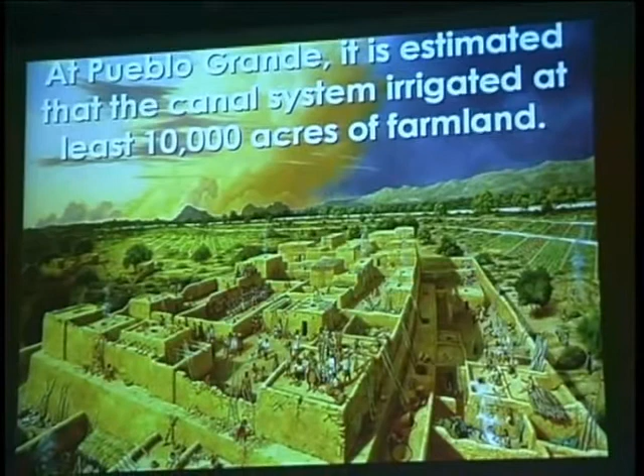One of the early ruins in the Salt River Valley, which Phoenix is in, is called Pueblo Grande. At this site, you can go—there's a museum there, and the old platform mound is still there. This is what they imagined it looked like, but they estimate that at this particular settlement they irrigated at least 10,000 acres of farmland.

The Salt River flows, or used to flow, right through the Salt River Valley, and they had miles and miles of these canals that they dug by hand with stones—I'm not sure exactly what implements—but these are all the prehistoric canal alignments through the Salt River Valley. This is Tempe, where ASU is, and this is where downtown Phoenix is, just to give you bearings.

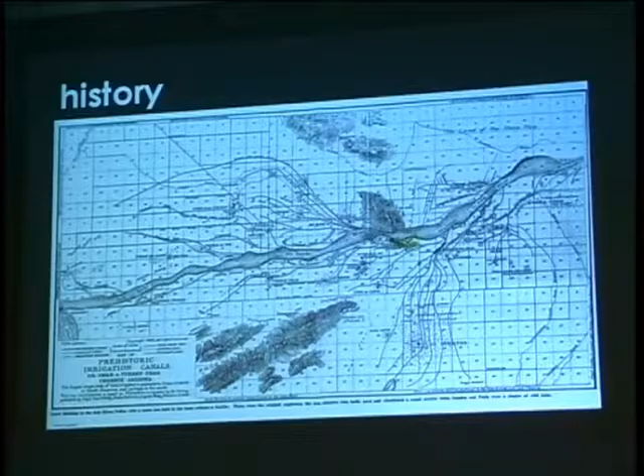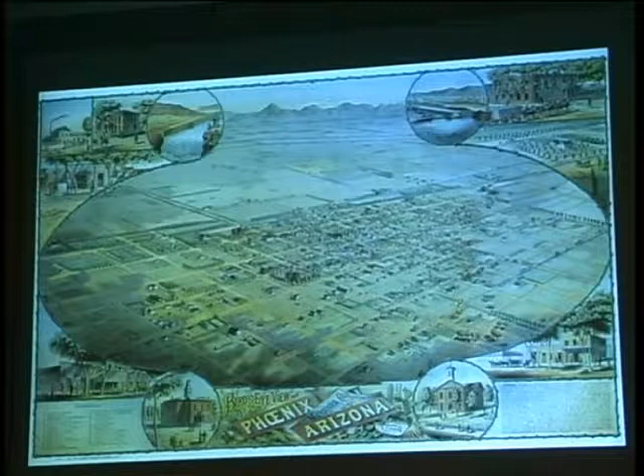So this place has always been about people's ability to move water, getting the water in so that they can survive. This is a map of Phoenix in the late 1800s, and the city fathers were touting Phoenix as a city of gardens.

By the first few decades of this century, many valley waterways and irrigated fields were so lush that visitors and civic boosters alike were calling Phoenix a city of gardens and trees. Everywhere there is shade, and plenty of it, observed a visitor in 1905. The entire valley, from Mesa into Phoenix, is one solid mass of green, and every road is a perfect avenue. Chinaberry trees, palm, and cottonwoods line the driveway, or lanes as they call them, and the entire distance from Mesa to Phoenix can be driven under an almost unbroken arch of shade.

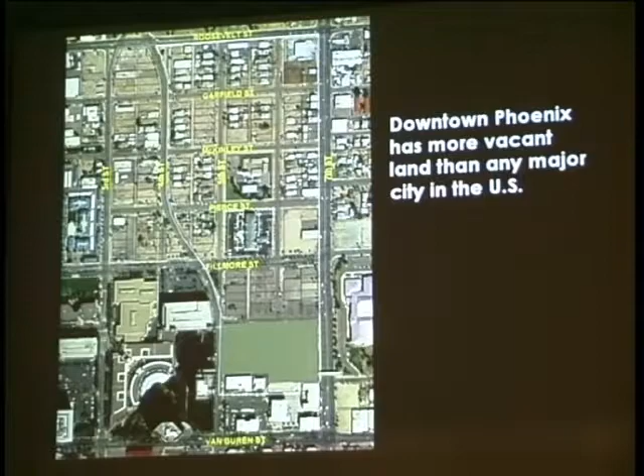So downtown Phoenix, this is an aerial view of a portion of downtown Phoenix, but it has more vacant land than any major city in the US. It's now the 5th largest city, and it's kind of like a donut. There's lots and lots of vacant land all throughout downtown. This is just right in downtown.

Our firm is really trying to figure out ways to connect the urban dweller with nature, because when you're in the city, you really lose the sense that you're in the desert. There are so many overly paved areas, places where nature isn't really even allowed in. And if it is allowed in, a lot of times it's a plant that might grow back east or in California. So we're kind of into really connecting people with the place of Arizona in the city.

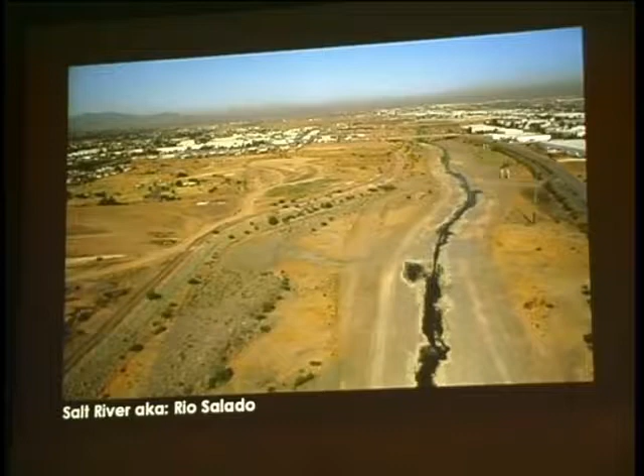I wanted to show you this, even though it's not a very good slide, but the Salt River actually flows right where this pointer is going. The Salt River used to have a floodplain miles wide, but now with the city encroaching, it's become this constricted riverway. Industry is also formed right on the edges.

For about 100 years, people have thrown their trash all along the banks of the river. There are landfills, gravel mining pits, I mean, it's just been abused. And then, further upstream, the Roosevelt Dam was built, so there's no water in the river unless there's a big rainy season and they let some of that water out. So it's really been this scar that has divided what you saw of downtown Phoenix with South Phoenix.

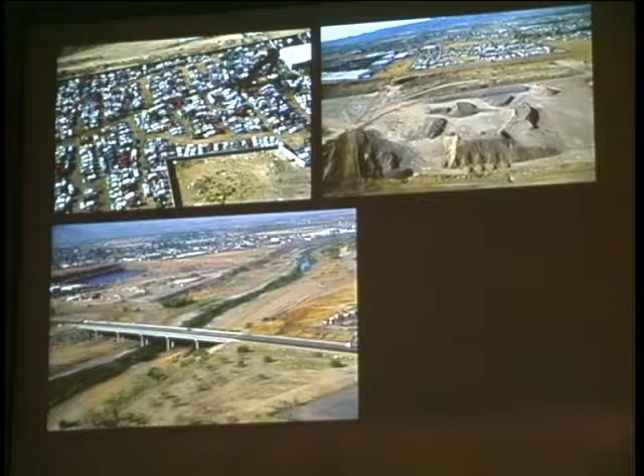So I'm telling you about this project with the Corps of Engineers in the city of Phoenix to try to restore the native habitat that used to grow along the river.

Our first project was on Central Avenue, and the city wanted to somehow mark going over the river, because you hardly noticed it, the land just sort of barely fell away from the road. It was always kind of bare, and you just didn't pay much attention to it.

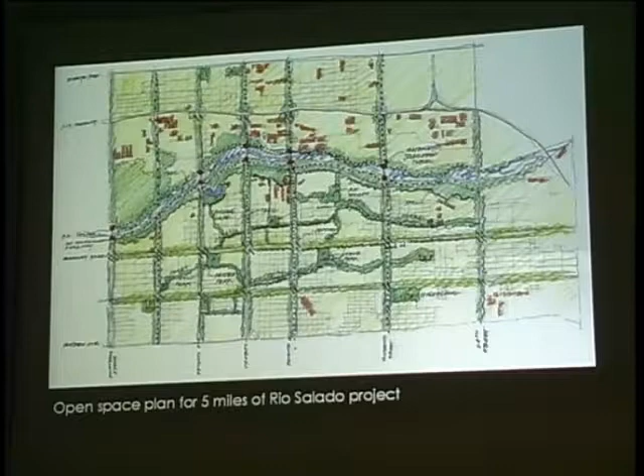We worked on this with a team, an architect and engineer, but we were really inspired by the Hohokam platform mounds, like that first one I showed you, and how they built places to view the river. We knew this was going to be essentially a trailhead for future trails the Corps of Engineers was going to do on the river.

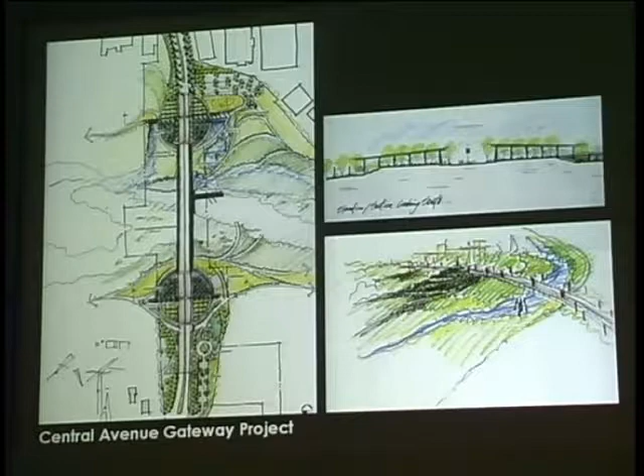So we proposed these plaza-like nodes on either side of the river with a shade structure, planted with a bosque of trees, that celebrate that passage over the water and create a meeting place before you go down to the trails below into the Salt River bed.

This is like a perspective sketch. This is very typical of what our concept sketches look like in the beginning, when we're trying to express an idea.

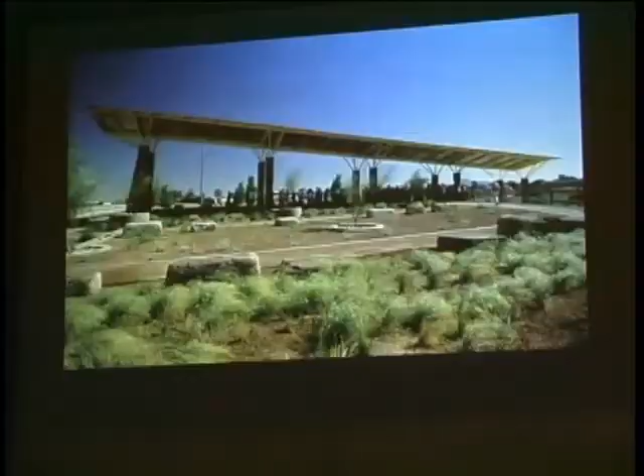So this is the first phase, and the City of Phoenix has actually built this with their own forces. They've been very short of money and just haven't had a whole bunch to put into it, but you can see as it's growing, the trees are becoming more prominent.

We wanted to convey the whole idea of irrigation and canals. On a civic project like this, typically there's no money for fountains or anything like that, so this was probably one of the first projects where we tried to use irrigation as a fountain. We created these irrigation canal runnels from tree to tree that you see when the water happens to be flowing.

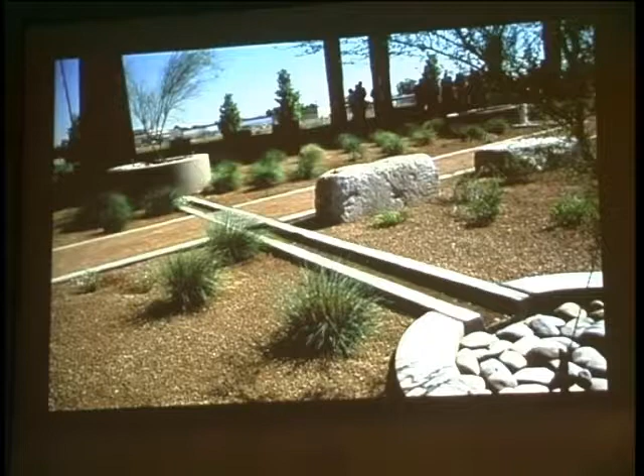You guys may be saying, geez, that's no fountain. But for us in Phoenix, it's a cool thing to even at some odd moment actually see water running through something. So the other thing we felt we had to do was reuse the trash that people had thrown on the river.

These huge monoliths of concrete footings had tumbled down the river and been worn like that. We got to go pick all these found objects and put them in the plaza as little sculptural seating areas or places to pause, that show the power of water and hopefully teach kids that you don't throw away trash, you reuse it.

This is the other side of the river, the northeast quadrant. The whole theory of this habitat restoration is that first we're using a combination of wastewater from this big stormwater drain. There are several of them that feed out into the river, and that's one source.

The other source is groundwater, the first layer of polluted groundwater. There are all these landfills around, and that first layer of groundwater isn't so good. So this is the reservoir we created. The water gets pumped in here, and then we run it into smaller canals all through the site. This is a canal coming from one of the big stormwater drains.

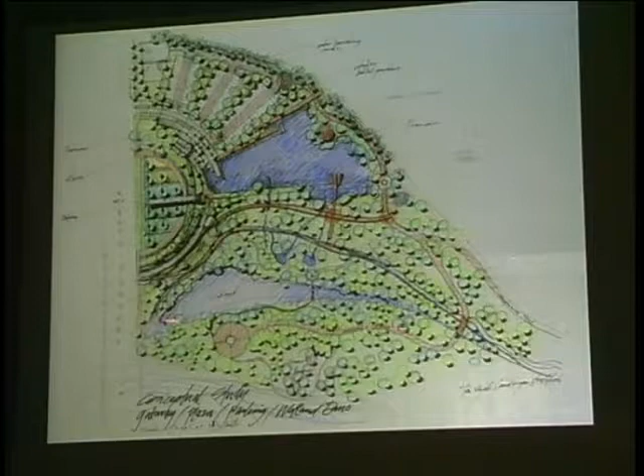Then we have trails all down on these banks. This is one of the little canals that feeds the habitat, looking back up at the gateway. Here you can see an old curb that we used as a seating element all throughout.

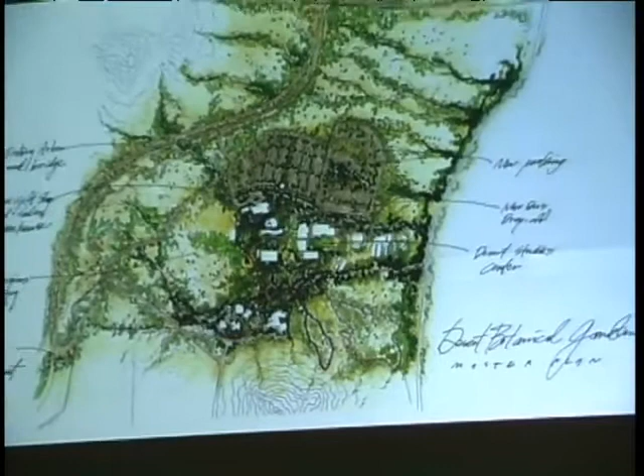John Douglas was the architect. This set of buildings and this set of buildings were built in this phase, and we were responsible for all the hardscape and exterior spaces.

This is the entry monument. There had been no monumentation at all when you came to the garden, just one of those standard little city-issued signs saying Desert Botanical Garden. We built this out of gabions and filled it with native stone, a simple entry monument marker.

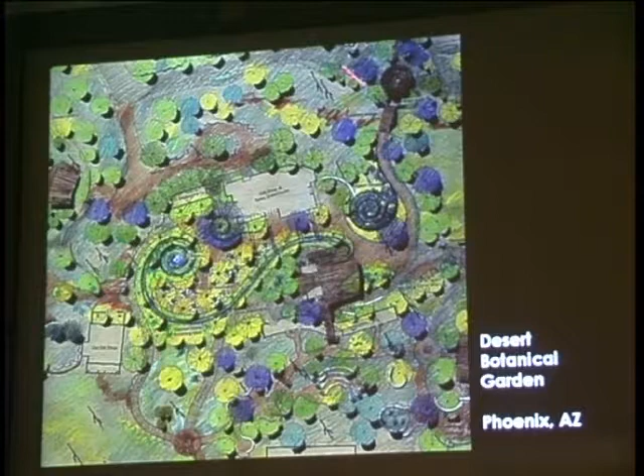That big parking lot I was telling you about is up here, so we intercepted the lane in the parking lot and put an entry pavilion here that helped to slow the traffic down so people couldn't whiz back and forth, and created a marker in the parking lot to draw people in.

The symbol of the garden is the agave, which you may have heard of as the century plant.

We wanted to showcase the ethnobotanical studies and research that the garden had done on the agave at the entry, and to kind of lead people in and create a focal point and also a baffle for the gift shop, we wanted to get people right in here. This is the new admissions area.

We created a landform here that's sort of in celebration of the agave. Then we needed outdoor space at the new gift shop. This is the exit, and so we carved a space where this old parking lot used to be, all through here, and made this rainwater harvesting garden and plaza area.

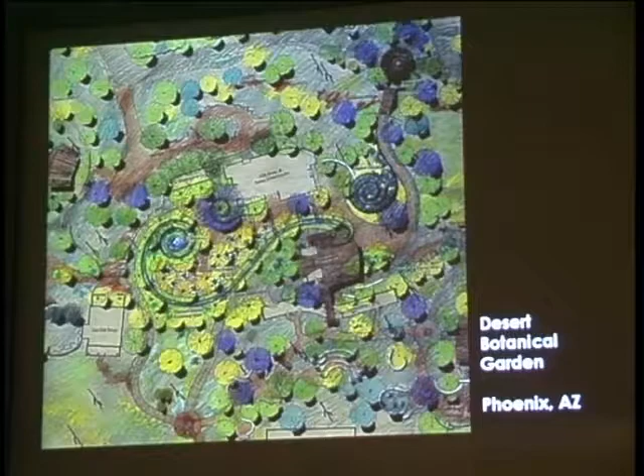This is a shot looking down at the entry arbor. Again, this road used to go all the way through, so we broke out a little island there and did this entry arbor and bridge.

There was a wash here, and you never used to even know it. Do y'all know what a wash is? Or an arroyo? It's where water runs, sometimes very rarely, but it's a dip in the grade where lusher trees and things grow. Those are some of the most precious parts of the desert, where the water flows.

So we created a bridge there. Before, they just had a little walkway and a little pipe about that big—you'd hardly even know that you were going over an arroyo. So we wanted to celebrate that crossing.

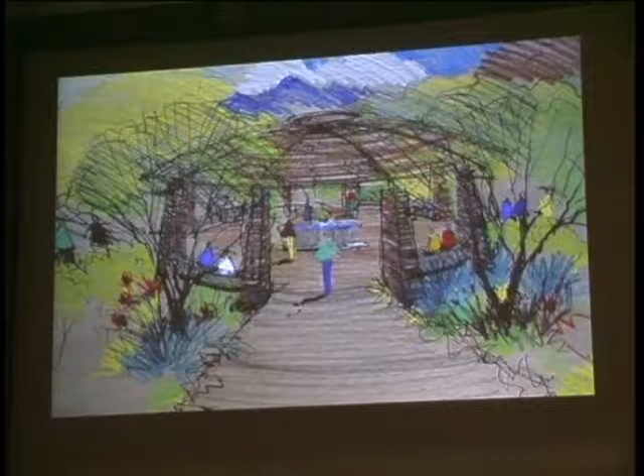These are entry sketches of the entry arbor. We went through some budget cuts and everything, but these helped to raise money—they used our sketches to raise the $15 million they needed for the entire project.

This is how it turned out—we lost our stone for budget reasons, and in Phoenix we're always trying to come up with ways to use just regular materials in interesting ways. This is made out of basically just weathered steel pipe and rebar, and we wove the rebar in and out of the joists. Eventually, the plan is for the desert vine, Mascagnia macroptera, to grow up that.

We also used a tractor disc for this little fountain. We don't have the big budgets—I know 15 million sounds like a lot, but a lot of that went to the architecture, and we had about 6 to 6.5 million for all the things like the entry arbor, the walkways, changing the parking lots, the bridge, etc. So that's just looking back.

Just some detail shots of the rebar climbing up and the vine climbing up the entry arbor. And our bridges, we used a C channel for the top and inlaid it with stones. In every project, we're always looking for ways to appeal to all the senses, including touch, and it's become kind of a trademark detail of the Desert Botanical Garden.

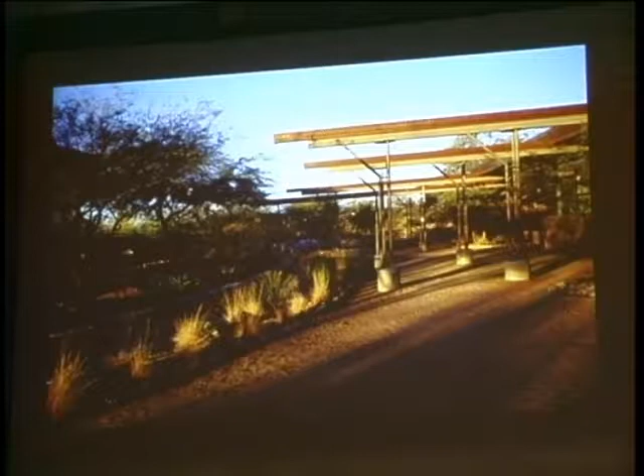Looking back out, you can see this is where our water harvesting runnel starts. We worked with John Douglas to get the water from the roof of the gift shop. It's not that big of a roof, so we're not going to get tons of water, but it was really about expressing how sacred water is to us and making the path of water a special place in the garden.

This is looking back where it goes deeper and deeper into the existing grade. The parking lot was basically up at that higher grade, and we just cut and carved in, sculpted this little plaza. There's lots of kids in urban Phoenix that never get out hiking in the arroyos or the washes. This is just one near Piestewa Peak, but they're just special places where you're sheltered and cooler, and that was really the sense.

This was the parking lot that was there before, and this is after, in about the same spot. Hopefully people, even though they may not get to the desert, would get the feeling of what it feels like to be next to an arroyo.

This is a sketch that we did in the beginning to show the concept, and then this is it from last year after it's grown. The final place where the water goes is right back in here. It's kind of hard to see in this.

This is a wildflower pavilion that we designed with very natural materials, just nestled into the desert, where they hold weddings and special dinners and things.

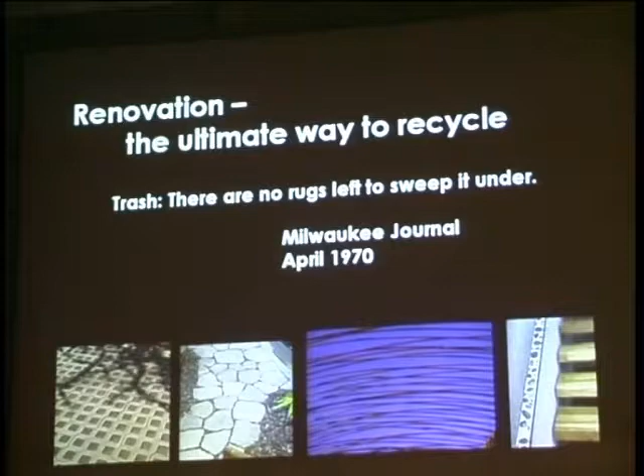We've done a lot of renovation projects, and I love working on renovation projects. This is my building, my office building, that I convinced a bank to let us borrow the money to buy—so that's a before picture. It looked like a little dentist's office kind of thing, and that's it now. We sandblasted it all, changed that front soffit, and totally redid the landscape and hardscape.

We used gabions for the retaining wall out front. I love the thought of using these because the block and the concrete that the building itself is made of is what this rock is that came down the Salt River—they grind it up and make the concrete. So it was just kind of like the rock in all its forms.

This is our parking lot. We used a permeable paver and then stabilized granite entryway. I planted this—it used to be asphalt all the way to the west side of the building, and then there was that little piece of turf out front. But this is right in central Phoenix where it happens to be very lush and green, so I used all desert riparian grasses and the native mesquite. It blends in, but it also stands out. That's the entry up to the front.

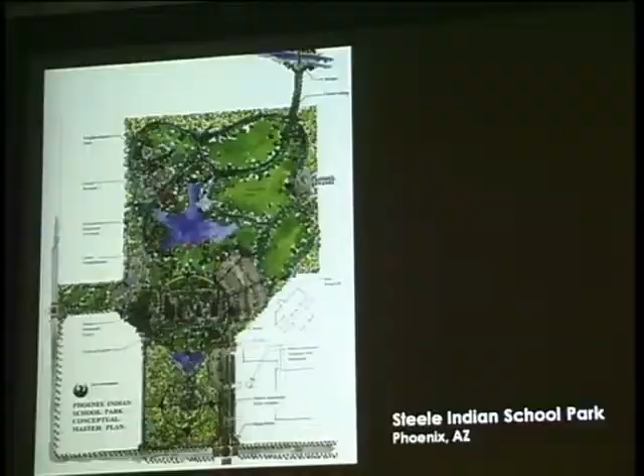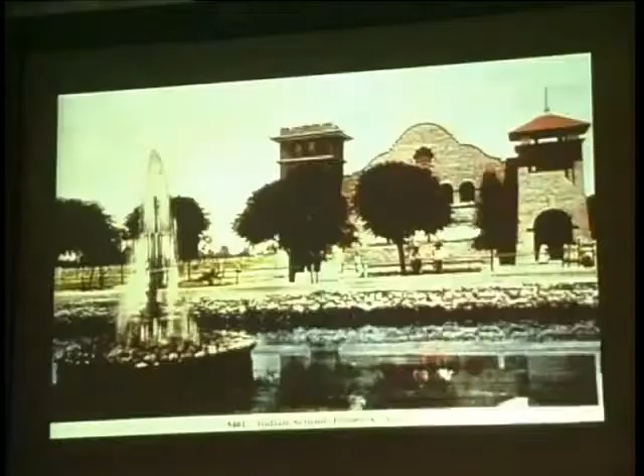Around the main part of the 3 existing buildings, we kept some of the existing landscape character that was always there. It was always sort of formally planted and very green. It's always been an oasis for the city of Phoenix. This is a historic photograph looking at the cafeteria building, and this is it today. That's actually a blue heron fishing in the lake there.

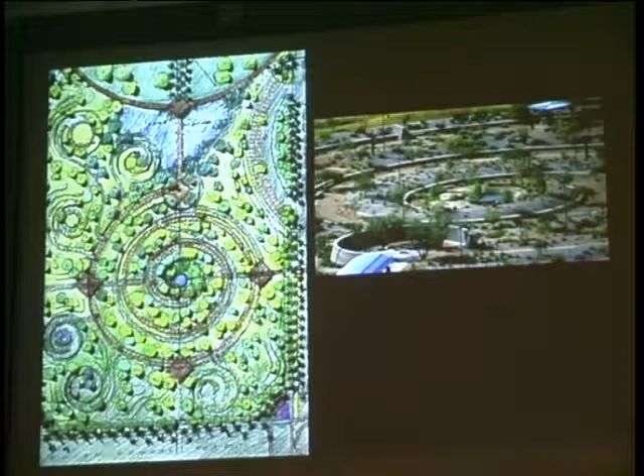Again, in our workshops with the Native Americans, they said they wanted water to be expressed in the site, to be a central theme, because they owed their existence to the presence of water. So this is in the central part of that historic core. We also asked them what they would want to see for this—this is about 10 acres, this particular garden, to the south of that historic core. How would they like us to approach this?

They basically told us they wanted to go into the ground and be surrounded by their native plants. So this is that historic core. We designed a bridge that goes across this water, sort of like an archetypal passing into another place. And then what we call the kiva space here—this is the kiva with a fire source in the center. We have a half-a-mile trail if you go the whole way, and it goes 15 feet below ground.

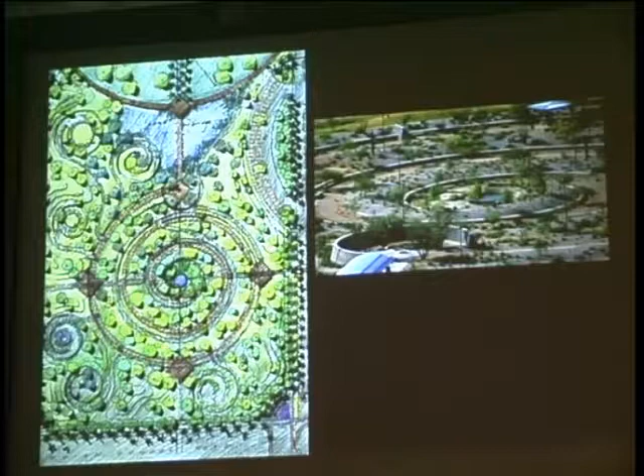This is in the kiva. We had some of the greatest quotes from the people in these workshops. One of the people there pretended they were this Native American spirit, and he wrote some of the most beautiful words, so we really wanted to use it in the park, and especially in this garden. This is a shot at the kiva where the fire pit is. We craned these 4 big old desert ironwoods in. But our people are one, even though we come from many tribes. We are all brothers and sisters, and the earth is our mother.

It is in this meeting place that we all gather to remember our mother, to remember our past, and to plan our futures. Here, all things are good and point to a bright tomorrow. I have visited this place often in my dreams. It is a place filled with magic and power. It is here that the past and the future can be bridged. It is here we can find ourselves.

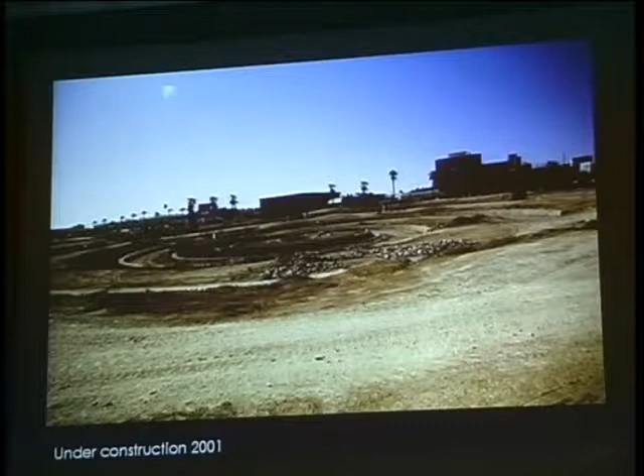So this was that garden under construction in 2001. The other motivating force to let this garden go in the ground was that the city of Phoenix said, we don't want anything blocking those 3 historic buildings. So this was part of our ammunition to let us dig this major excavation.

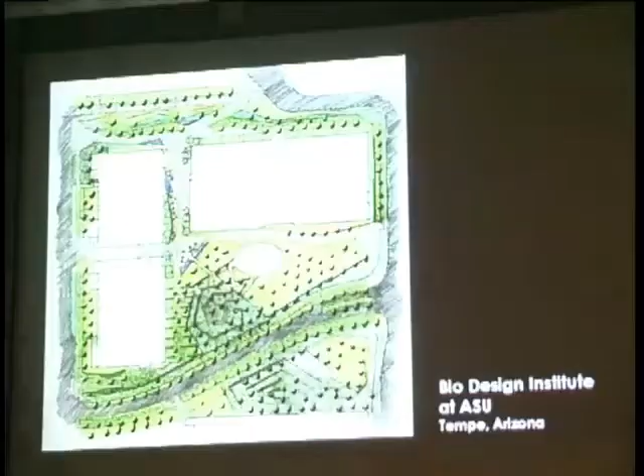I always liked this quote too: 'The desert is beautiful,' the Little Prince added, and that was true. I've always loved the desert. One sits down on a desert sand dune, sees nothing, hears nothing, yet through the silence something throbs and gleams. What makes the desert beautiful, said the Little Prince, is that somewhere it hides a well. I always feel like in a lot of our projects we're trying to create that little mysterious place where that water might be or might fall if it ever rains.

This is a pretty recent project that we've just finished, the Biodesign Institute at Arizona State University at the Tempe campus. These first two buildings are built now. This is a third phase - a conference center - and this is an existing parking garage. The architects we worked with are Gould Evans, and they set these big old buildings up on a 5-foot plinth.

And plinths are big with architects these days. It's as if their buildings aren't high enough. Not trying to offend any of the architects in the room, but anyway, I love architects.

So the other thing was that next to this parking garage, the city or the campus had to maintain this huge retention basin. In the desert, we don't get the soft gentle rains you guys get sometimes. When we get rain, it's a deluge and they don't know what to do with it. In fact, there are parts of Phoenix where we have canals bringing water in from the Colorado River, from the Colorado Rockies, and right next to it a Corps of Engineers drainage ditch that takes out rainwater as quickly as possible. It's ironic and bizarre, but that's where we live.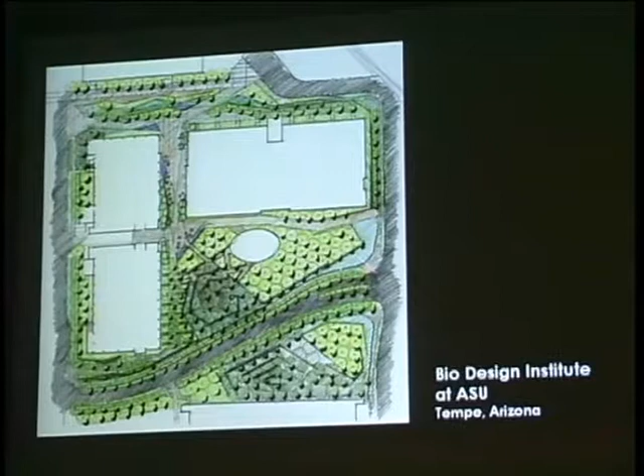So many projects are required to have these retention basins, and we've always tried to make them into an urban wildlife habitat kind of opportunity. So we got the idea: what if we took the plinth around and showed the bajada landscape in a stylized way, and with this retention basin, take it across the road to show what it's like to be in a wash or an arroyo.

Because we're interested in the fact that when this conference center gets built, they're going to have researchers from all over the globe coming to visit, we wanted to give them the experience of what it feels like to be in the desert.

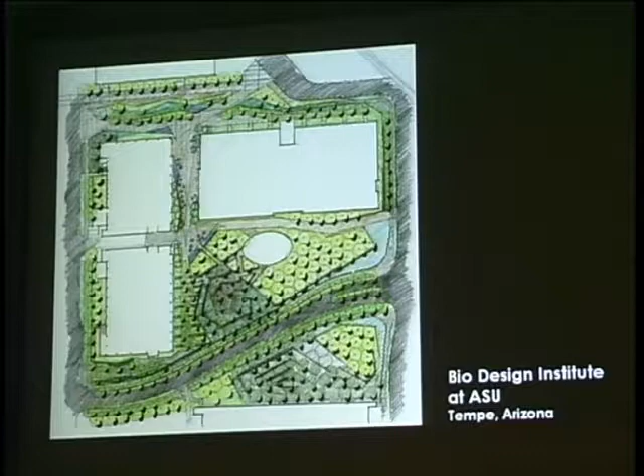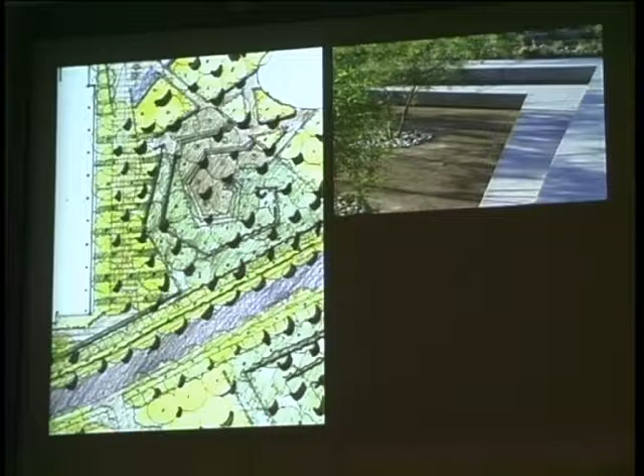For our water harvesting, we decided to make this riparian biome that connects with the one across the street, and we also wanted to wrap in an outdoor gathering space surrounded by what we call a biosponge—which is nothing more than a garden, but we liked the name. We get all the water from the roof, and it comes out into the garden here. We take it around, and if we ever have a humongous rain event, it eventually goes into this drain and across to the larger retention area.

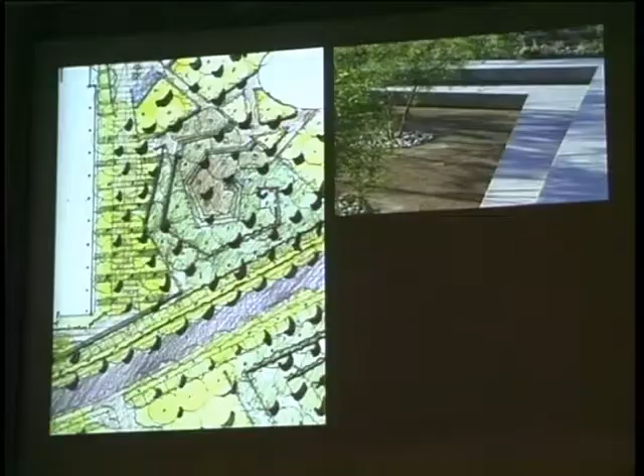So this is where the water comes out, and this was really neat. This site isn't that far from the Salt River, although it's far out of the floodplain now. It probably used to be in it—you dig down about 10 feet and river rock is down there, the old riverbed. Anyway, this was it last year.

And this is a place in the amphitheater, again, where we used irrigation as an excuse to do this sculptural termination of the amphitheater. If you happen to be there when that valve goes on, it'll puddle up with water and spill into the garden.

This is a project in Tucson we're doing, a cancer center clinic. You'll come to this phase 1 building to get diagnosed if you have cancer, and come here to get treated—they'll administer chemotherapy here. I've heard nightmare tales of people with cancer lined up in wheelchairs in a gray room, just getting imbibed with chemo. So our client here really wanted to do something different and make it more of a healing kind of place.

It's a really neat piece of property in Tucson—you can almost feel the land drawing you down to the Rillito River, with the Catalinas in the distance. This was actually the old site of the Tucson General Hospital, and the co-architects out of LA have totally gutted it and are redoing it. So that's the first phase building.

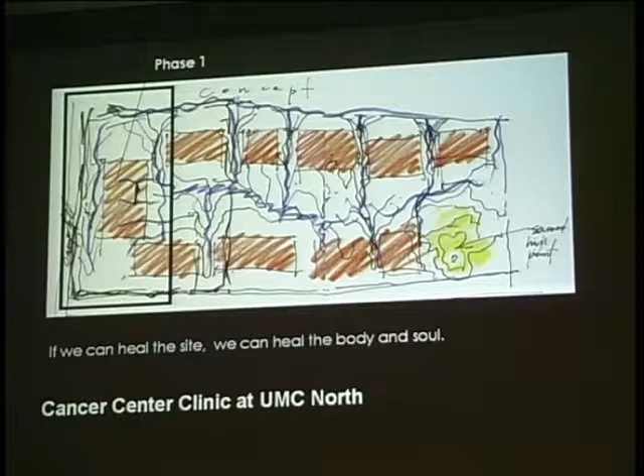But what we propose is that eventually the master plan of the site tries to reinvent what the arroyos might have done on that site and create healing gardens outside of each different building that gets built.

So this is that first phase. This is a temporary parking lot until they start to build the parking structures. But you get out of your car and come in these different places to the different clinics. They wanted separate entries for all the different clinics, so the way we have it, you actually go over bridges to get into the clinic.

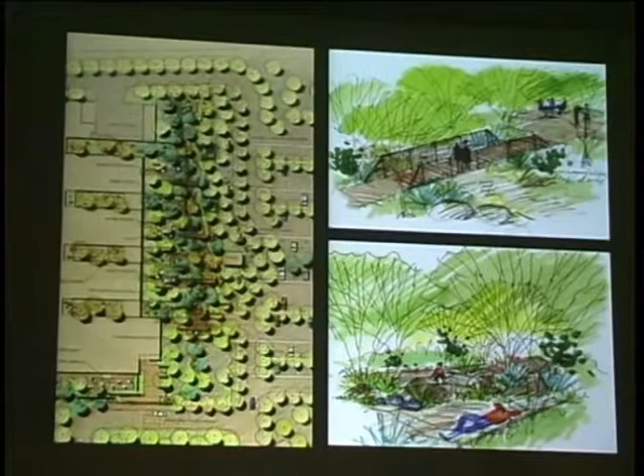Our hope is that as you start to come from the parking lot, you really start to decompress. You're surrounded by desert trees, birds, butterflies, and all those good things, and it sort of helps settle your heart down as you're walking in.

So we have the riparian Arizona sycamore growing in there, but then out here we have the Palo Verdes, mesquites, and ironwood. These are little cantilevered patios that come out off each of the clinics for people to sit and have a cup of iced tea.

This is the arroyo, and then we have a trail that goes around, also kind of a meditative trail, so if you wanted to just take a break and take a walk you could. We also created these little niches built into the landform between the parking lot and the clinic for people if they really wanted to be totally alone and away from other people.

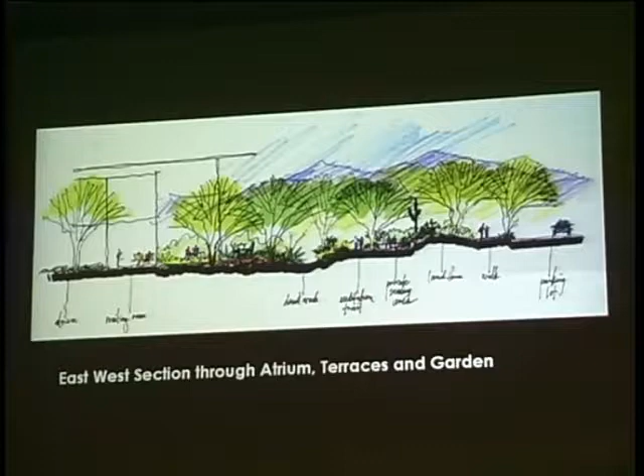This is a sketch looking down the arroyo. We're harvesting the roof water and the condensate from the air conditioning systems that will go and help feed the garden. A lot of these places where we create these depressions, or even that runnel at the Desert Botanical Garden, it's not so much about the water as the memory of water. It's really more about just praying and hoping someday it'll come and be there.

But a lot of people don't understand that. Even people in Phoenix don't understand it. But anyway, this is another project.

This is U of A, their College of Architecture and Landscape Architecture. This is the existing building. Mainly architecture is in there right now, and landscape architecture is in another building. They're building another great big building right here to unite everybody in the program.

And the college told us, Ron Stoltz, make the landscape a learning experience, make it interpretive, use a range of materials, make it an oasis, make it fun and an attraction.

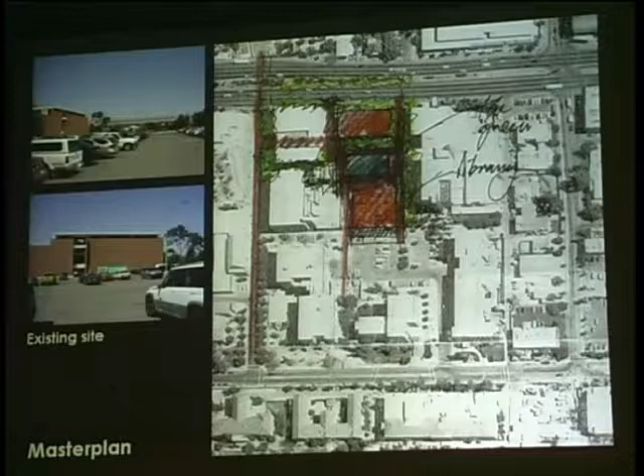This is a very busy road, and it's got the right name — it's called Speedway. But what we could see is there's a future library that's going to be built here, so this was just a quick little sketch to show how this new project would fit in with the future library. As you can see from these photos, it was practically all asphalt.

So this is what we've proposed. This is the new building, but we've proposed to make this garden and rip up this asphalt as much as they would let us, and use all the sources of water that we can from the building. Just like a canyon has these secret little mysterious places where water seeps out, we felt like the building could act like the canyon walls.

So we're getting the gray water, which is mainly from the sinks and drinking fountains, and we're getting all the roof water. Then we were having a meeting one day with facilities, and a guy said, hey, you can have some water we get off this — I forget what it is, but it's some kind of wastewater created from another building. So everybody's sort of funneling all the water together to let us use for this garden.

It comes out in our upper level of the garden and goes down into these bioremediation ponds, and this will be like a learning laboratory for students to plant different things and see what works and what doesn't, but also create this fantastic habitat not only for students and professors, but also the birds of the area.

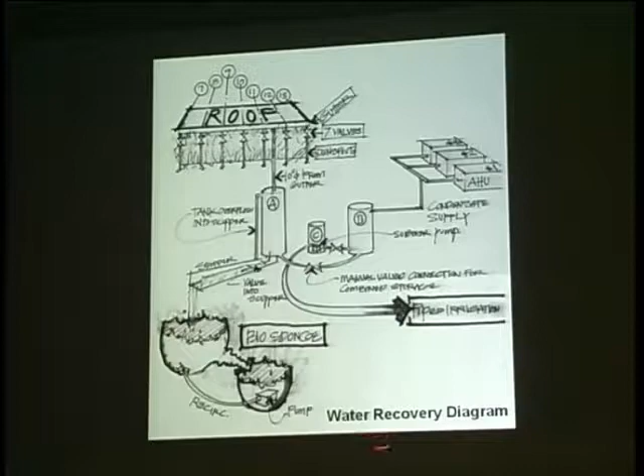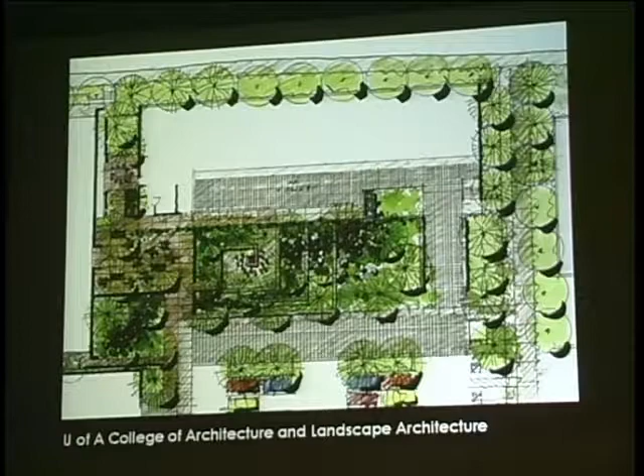This is basically the concept. We took the roof water and condensate and it goes into different tanks. The gray water goes into one area of the garden because the students want to specifically study the effects of gray water on plants versus storm water, and into the biosponge. This is just a close-up drawing of it. I was proposing also to have a little fire pit down in that sunken garden area, but they X'd that out.

Again, this back area was all concrete and granite. It had concrete where stormwater from the parking lot went, and we're just proposing to make it green.

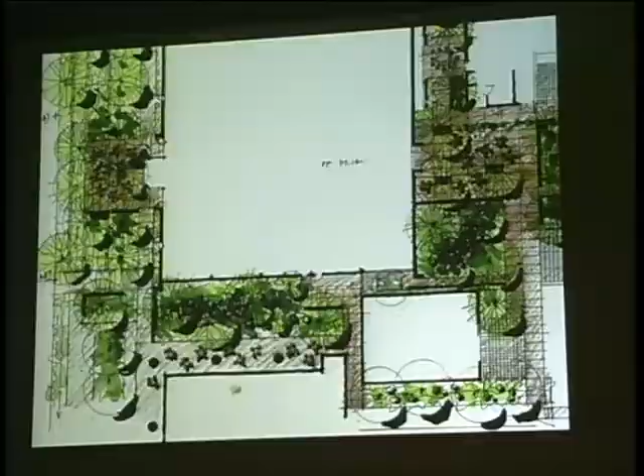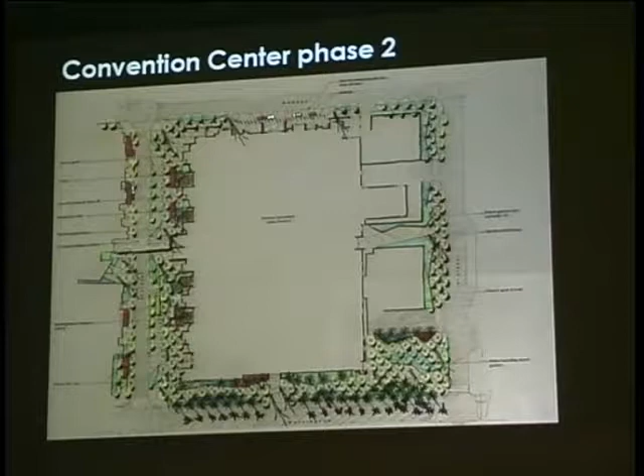This is the convention center in Phoenix, and the main thing I wanted to talk about was this plaza area where we're doing a water harvesting garden. We've got a wall that's about 110 feet long and about 12 feet tall, constructed out of wire mesh, soil, and stone.

We're getting the condensate from the air conditioners at the convention center, just a portion of it. We had to fight for every little condenser unit we could to get the water from, because it costs extra to have a separate pipe for condensate. Usually they put it right into the sewer system. But condensate is totally sterile—it's like distilled water. It's great water.

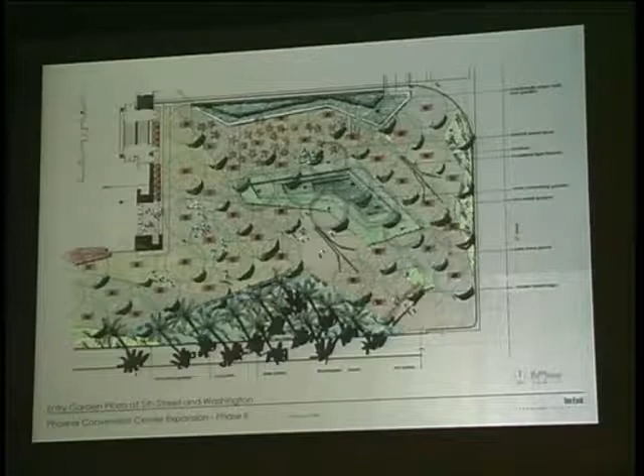So we're bringing it in, and it'll drip into the top of our water wall and then into our desert riparian garden.

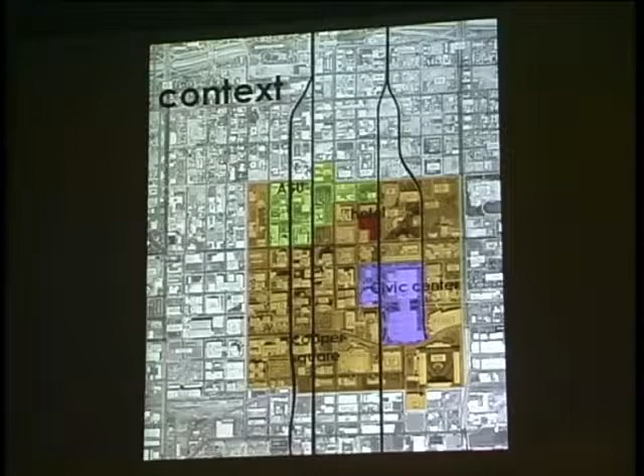With ASU, we've been doing a lot of work trying to help them define what their campus is like in downtown. President Crow really wants this university to totally blend with the rest of the downtown, although there's not much to blend with down there right now.

It's pretty blank. So we're proposing new civic spaces in downtown, with streetscapes where we narrow the roads and create more room for the pedestrian, bringing some of our region into downtown.

This is the Palo Verde tree, and we really feel like this tree is what the cherry tree is to Japan and Washington, D.C. This is our cherry tree, the Palo Verde. It has these cadmium yellow blooms about this time of year, bringing that feel of our region into downtown. They also create great shade if they're properly maintained.

So we're proposing these linear shade gardens along the streets. This is just a shot trying to show making the intersections and the plazas—the entry points to these buildings—major gathering spaces.

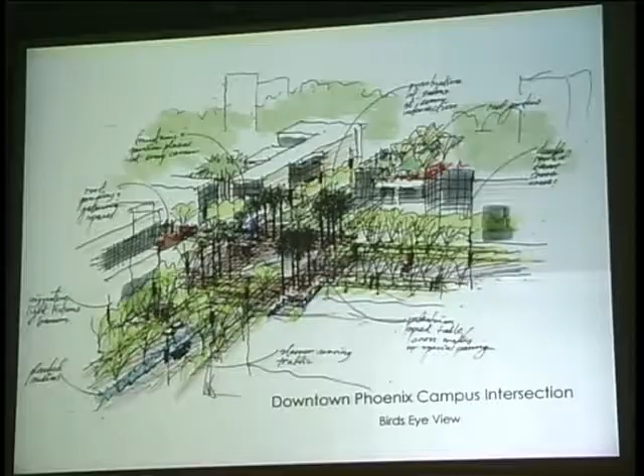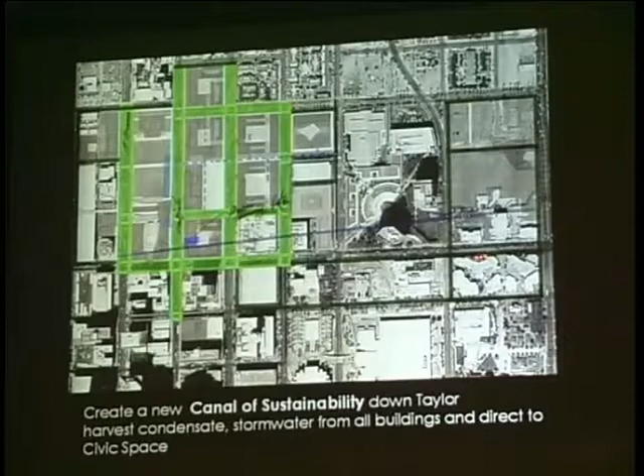We're also intrigued with the history that actually lays under the existing hardscape of the city, long forgotten. There was a canal that went right through downtown Phoenix. We had this idea of how we could start to hint at what used to be here, but in a new way.

So we've proposed a series of systems of small runnels that might go through downtown Phoenix, harvesting the condensate from all these big high-rises. There are hundreds of thousands of gallons of condensate that go into the sewer. It's an ephemeral source of water, but it could flow into these canals leading to civic spaces and help water the parks and linear gardens.

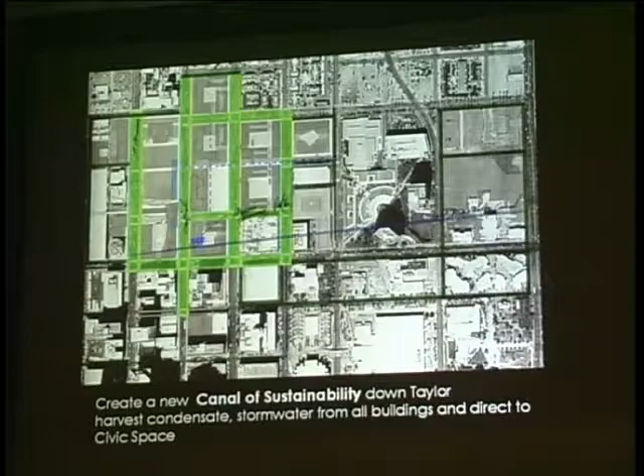Harvesting gray water and condensate is nothing new. San Antonio and lots of other places already have ordinances in effect requiring the use of this water.

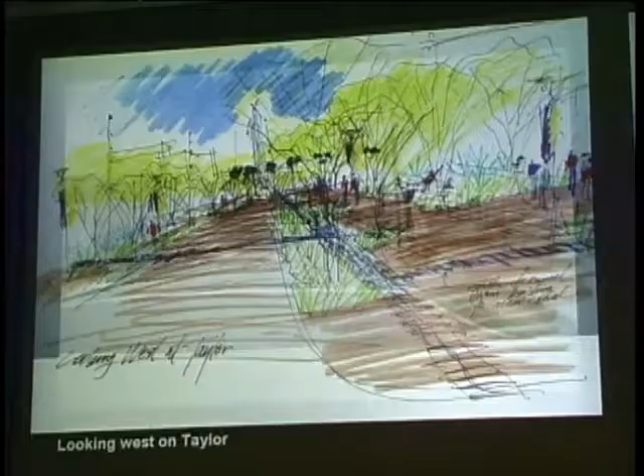So this is a typical existing downtown street in Phoenix, with some sketches—this one happens to lead through the new campus—on widening the pedestrian ways and creating these little runnels of water.

This is a shot I took at a place called Bilello Ranch in West Texas, but it could be nothing more than just some articulation in the hardscape that would thread water if and when it does come through downtown Phoenix. And it could take various forms.

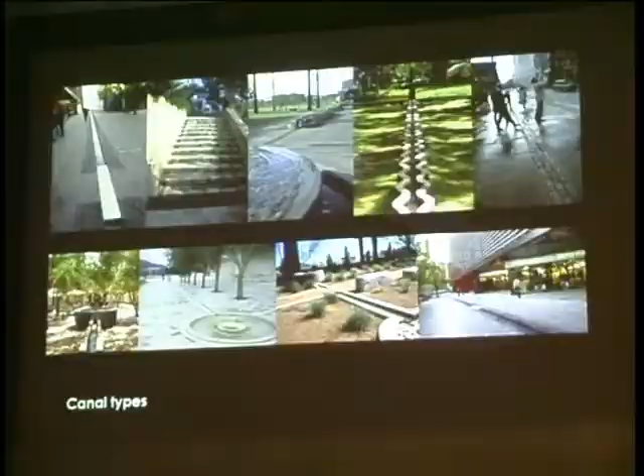Public artists and what these cisterns might look like. They could be these very artistic vessels of water all through downtown that would be connected with this little trough.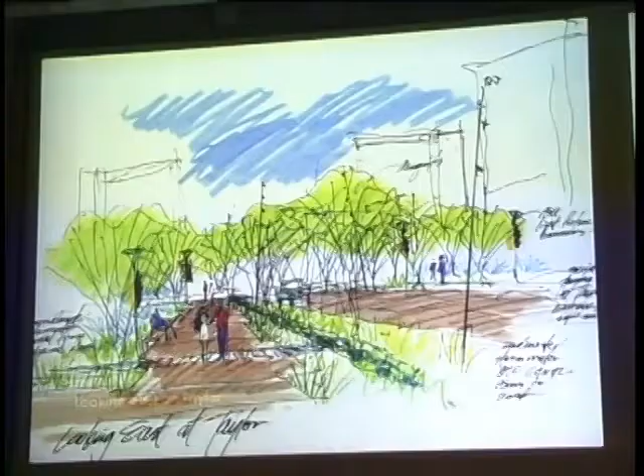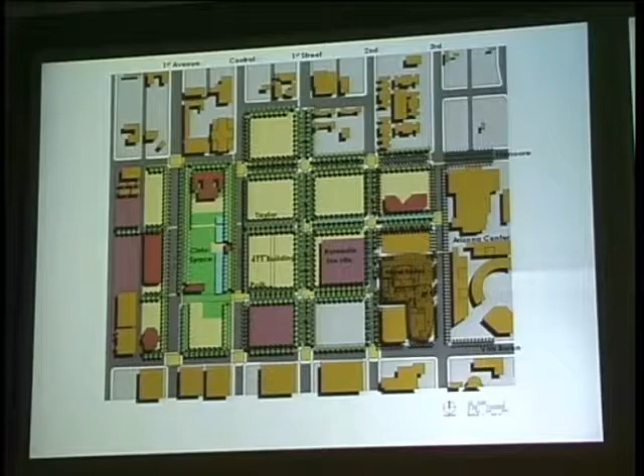Again, just some more before and after sketches of different parts of Phoenix. So this first little canal would come down Taylor and then into our civic space, where we'd have these bioremediation ponds, and then use it to irrigate the park. Just some shots of that civic space.

This was a doodle we did one Friday afternoon over the aerial of downtown Phoenix. What would we do if we could redo the city? The orange are new buildings we knew were going to take place, and the yellow indicates vacant land.

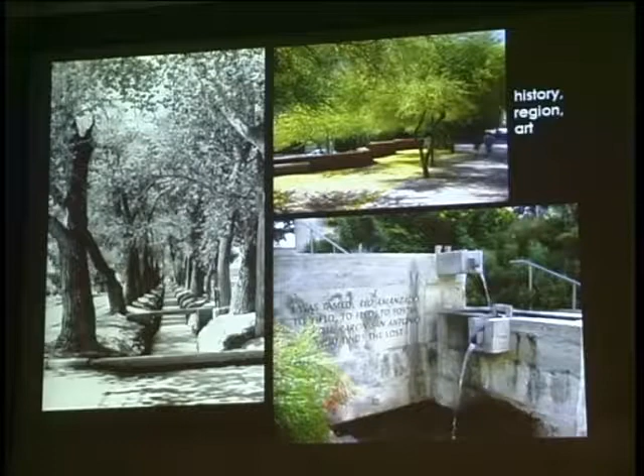That could be used for tree nurseries all throughout the downtown area, and then using streets to create these linear gardens, even alleys, and these pockets, entries and courts and places scattered through Phoenix.

That could draw people and combine history, region, and art. This is a project I've been working on with Foster and Partners out of London, Will Bruder out of Phoenix, and Behnisch and Partner out of Stuttgart. Our firms came together. This is showing Foster's work, Behnisch, Bruder who did the Phoenix City Library, and then our work at the Botanical Garden. But this is a mixed-use property.

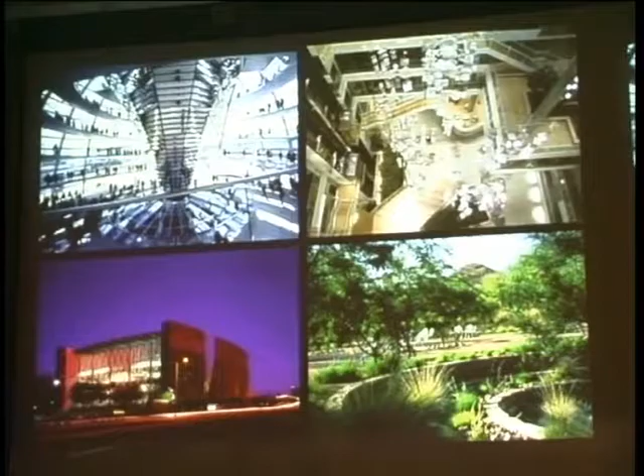It's to have academic housing or academic classrooms, student housing, market rate housing, retail. So it's a real mixed use project for the campus.

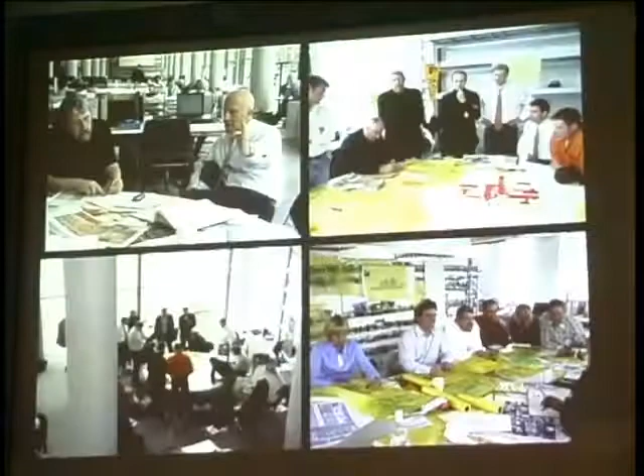And here we are all working in London at a design charrette. Again, just a plan showing the circulation patterns, how it would connect to the campus. This is the Tempe campus.

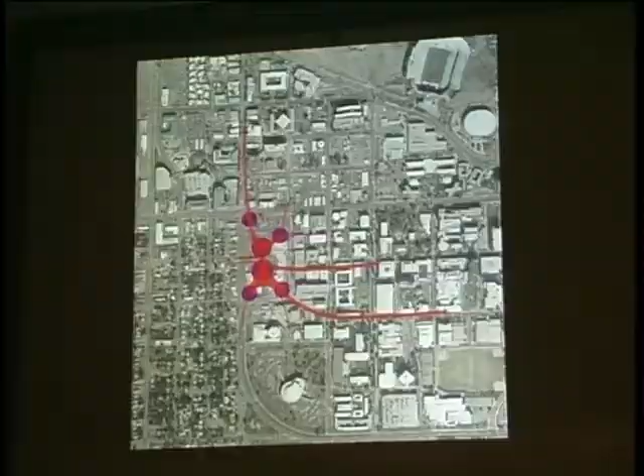This is Gammage Auditorium that Frank Lloyd Wright did. This is downtown Tempe, and how it would connect in with these existing malls into campus.

Our team was inspired, can you tell, by the canyons of Arizona. This is a shot of the model, this being Mill Avenue that goes into Tempe, and then all the new buildings, the business school, fine arts, a new hotel.

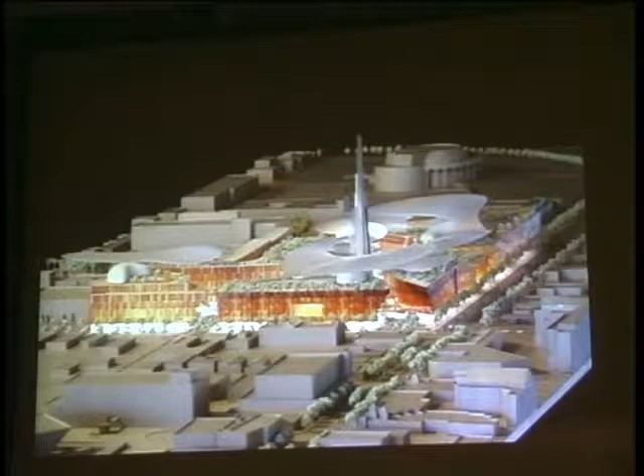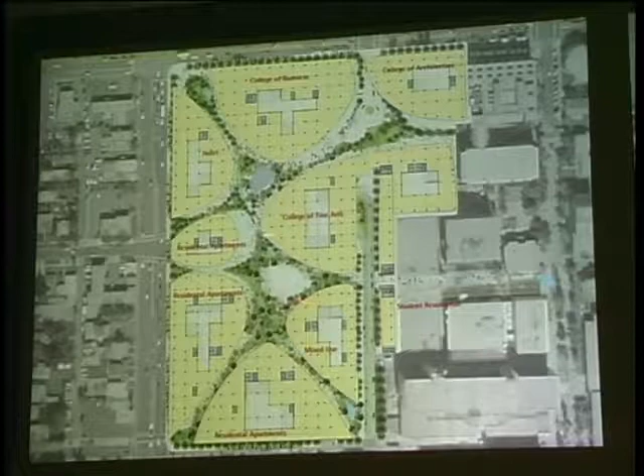We wanted it to be a place where people would be 24/7, an oasis for the campus. So here's the layout of all the buildings with this inner pedestrian space that weaves through and connects into campus and the rest of the city.

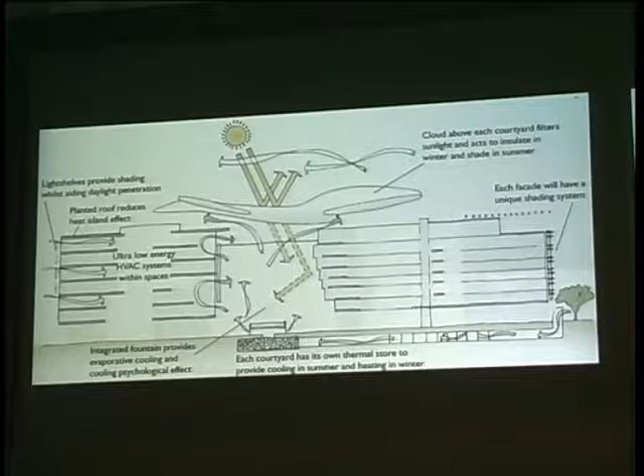We would use some sort of shading structure reminiscent of a cloud that would filter the harsh rays of the sun. Each courtyard has its own thermal store underneath to provide cooling in summer and heating in winter. We'd be harvesting all the water, rainwater, condensate, to use as water features through the site.

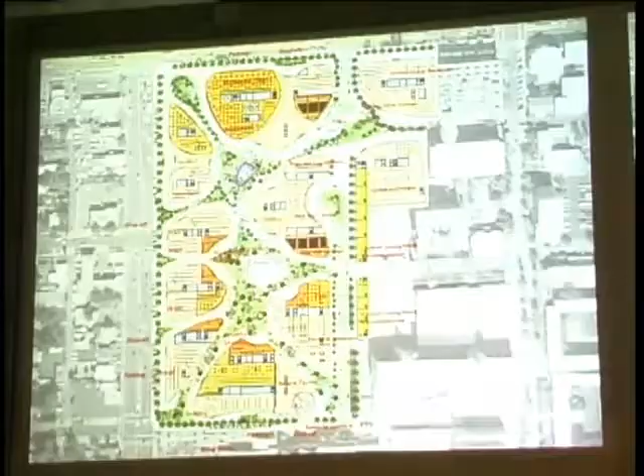Again, the influence of the canyon. If you've never been to Arizona, you really should go and hike through the Grand Canyon. It's an amazing place, and it's really hard for me to convey how special it is to you if you haven't been there.

Each building would have roof gardens and lots of gathering space on the roofs as well as down below. These are some of the roof garden plans. Again, the roof gardens would have more of the bajada landscape.

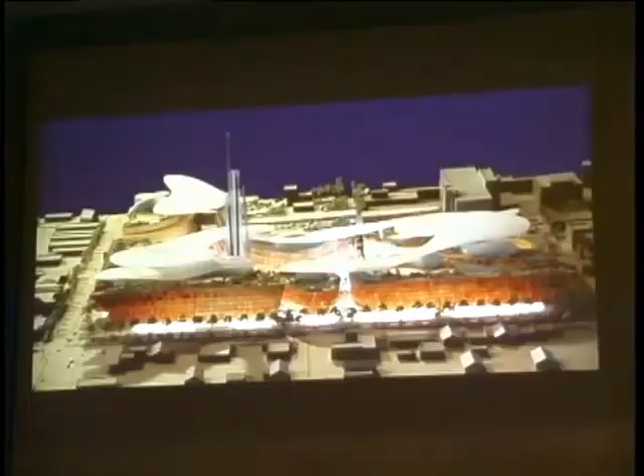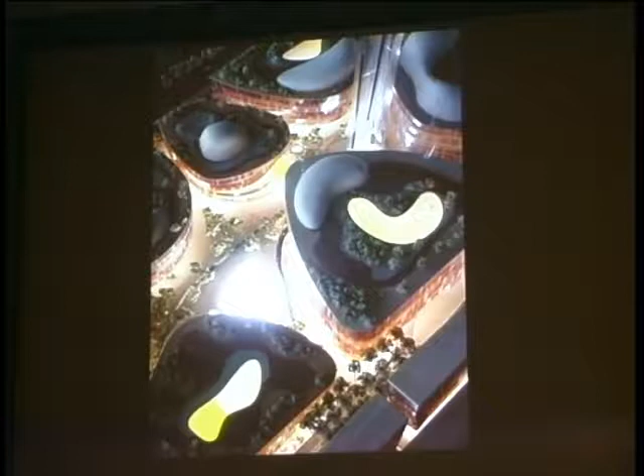For the clouds, it's some synthetic material. I don't know the exact material, and this was a competition which we won, but I know they're researching it right now, and it's gone through some amazing budget cuts. We still have clouds, though, I'm happy to report. But I'm not sure what material the architects are looking into for those. I'll find out and get back with you.

It's one of those materials that's going to last, or at least they say it'll last for 25 or 30 years. It's really intense, almost like a plastic kind of fabric. Yes, it blocks some of the sun, although it allows some to still come through.

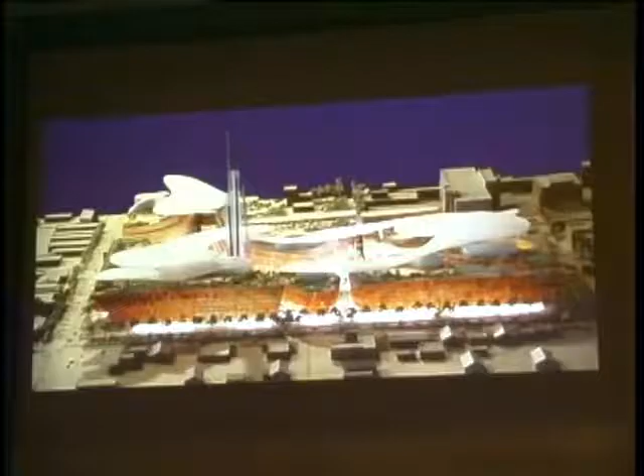So anyway, that's some of our work in Phoenix. Anybody have any questions? Thanks.